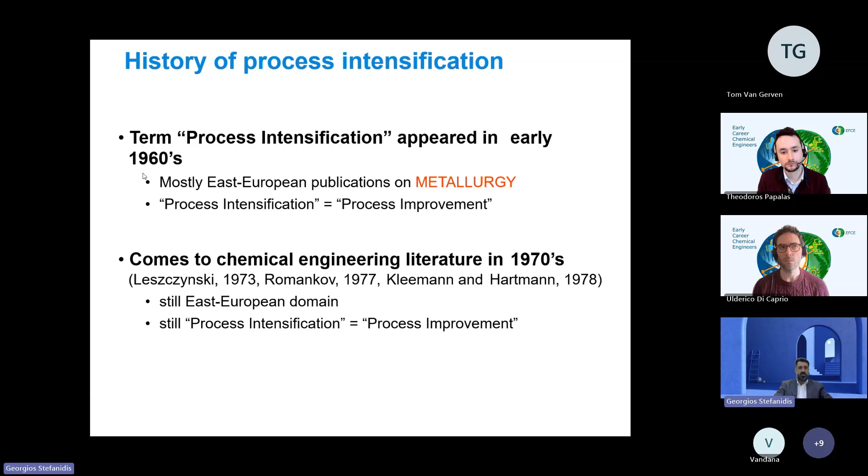In 1983, at a meeting of IChemE, Colin Ramshaw, as I mentioned before, introduces HiGee for the first time. He talks about exceedingly compact plants and an order of magnitude equipment reduction, and compactness was achieved by altering the transport regime, not by shrinking the geometry. Centrifugal acceleration replaced gravity as the governing hydrodynamic parameter.

Interestingly, the first paper presented at that conference was on intensified gold ore leaching. The authors talked about solid-liquid mass transfer intensification, so mass transfer was the bottleneck of that process. So it is clear that early PI was already targeting dominant transport limitations and physics-driven redesign.

In the 80s and early 90s, PI was mainly a British discipline. The focus started being on centrifugal forces, as I mentioned before, and then it evolved towards compact heat exchangers and intensified mixing. In 1995, there's the first dedicated process intensification conference, organized by PIN UK, the Process Intensification Network of UK. In the late 90s, several international research centers emerged in the States, in France, in Germany, in China, and several PI technologies were studied there.

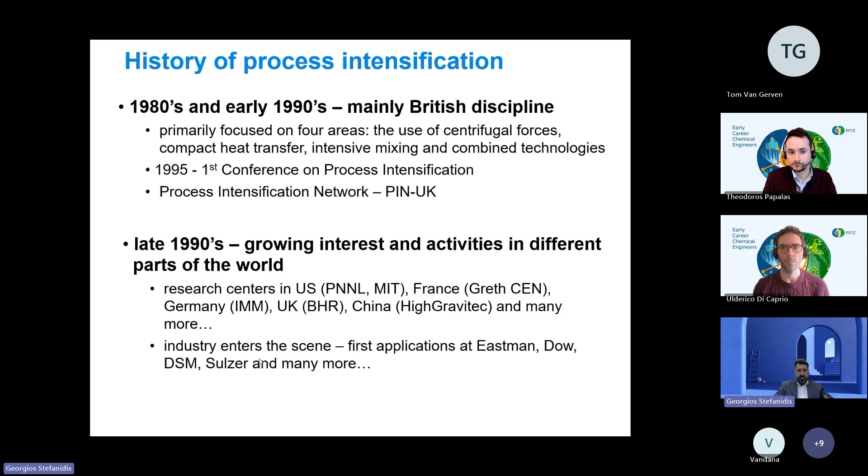In the late 90s, the involvement of industry in the field of process intensification becomes more prominent. Companies like Eastman, Dow, DSM start validating the performance, scalability, and robustness of certain PI technologies, such as reactive distillation, rotating packed beds, microreactors, static mixers. And the validation is done beyond the academic environment.

In the early 2000s, and from that moment on, there is a clear shift from compact equipment to sustainability-driven redesign. There is the recognition that transport and energy efficiency are central to decarbonization. PI becomes institutionalized, with more conferences, textbooks, journals, and research networks working on process intensification. PI is integrated into EU research programs and strategic roadmaps. So what we observe is a clear transition from innovation concepts to a more structural engineering paradigm.

If you scan the literature, there are more than 20 definitions and interpretations of process intensification. I've tried to classify them into different groups depending on the age each definition appeared. In the early 80s, as I said, the focus is on compactness — this is the keyword: compact equipment, order of magnitude reduction.

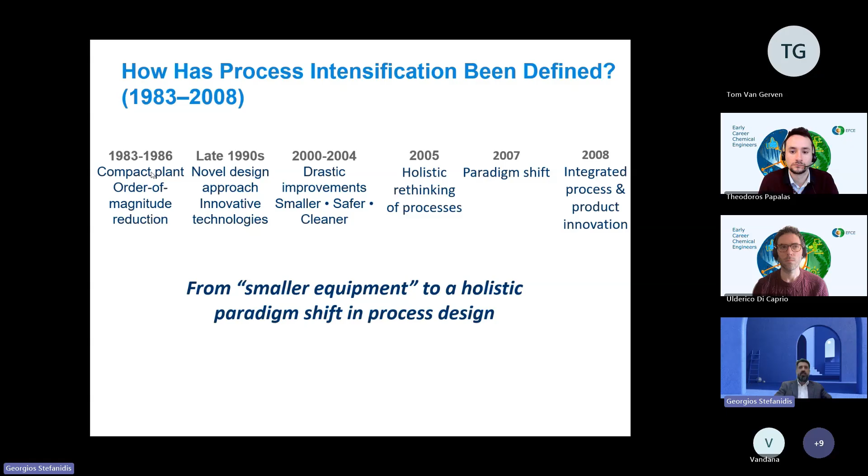In the late 90s, people talk more about novel design approaches and innovative technologies. In the early 2000s, they talk about drastic improvements in processes. It's from the middle of the first decade of the 2000s on that people start recognizing process intensification as a holistic approach to redesign processes and equipment within the broad field of chemical engineering.

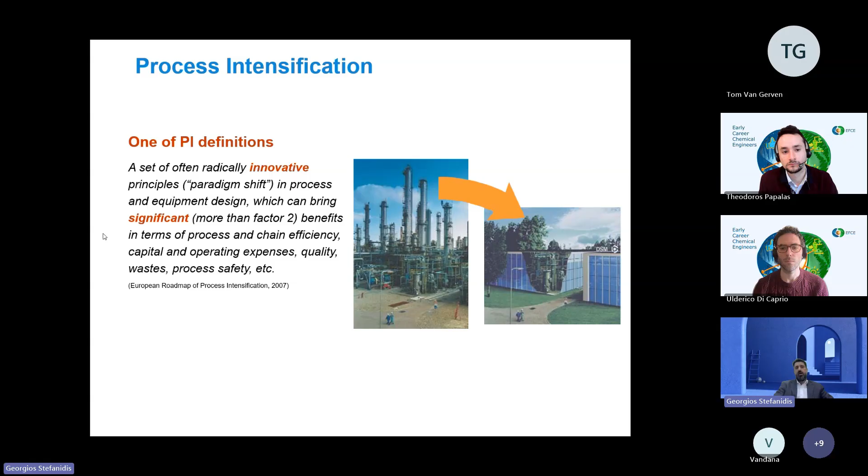From all the available PI definitions, this is my personal favorite. It was published in the European Roadmap of Process Intensification in 2007. It reads as a set of often radically innovative principles, a paradigm shift in process and equipment design, which can bring significantly more than a factor 2 benefits in terms of process and chain efficiency, cutting expenses, quality, waste, and process safety — or, to put it more simply, using much less to produce much more. Less meaning investment, space, time, raw materials, energy, inventory. Much would mean drastic improvement — factors, orders of magnitude, ideally — of improvements.

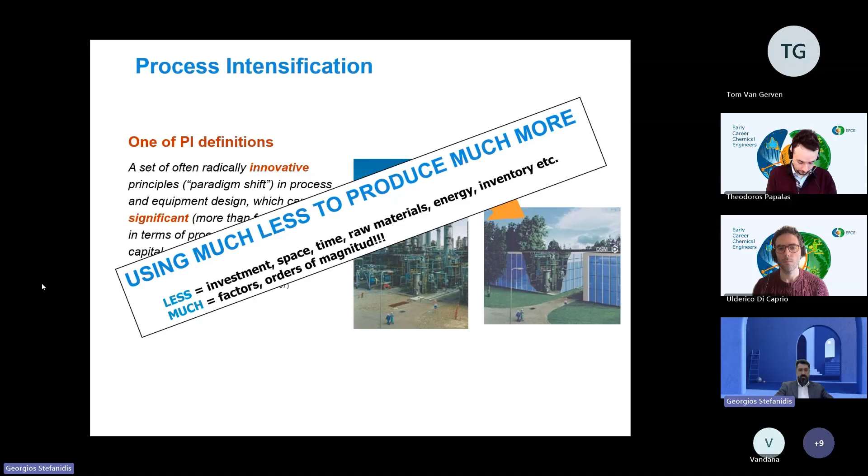Of course, the exact quantified benefits vary depending on the authors who report these benefits and work in the field of process intensification.

This is another report published in 2006 by Senter Novem, the Dutch Energy and Environmental Agency. They report energy savings in the range of 20 to 80%, capex and opex savings of 20 to 80%, selectivity and yield increases up to 10 times or even more, and significant process safety increase as the reactor volume and inventory of chemicals decrease up to 1,000 times, with better control of reactions.

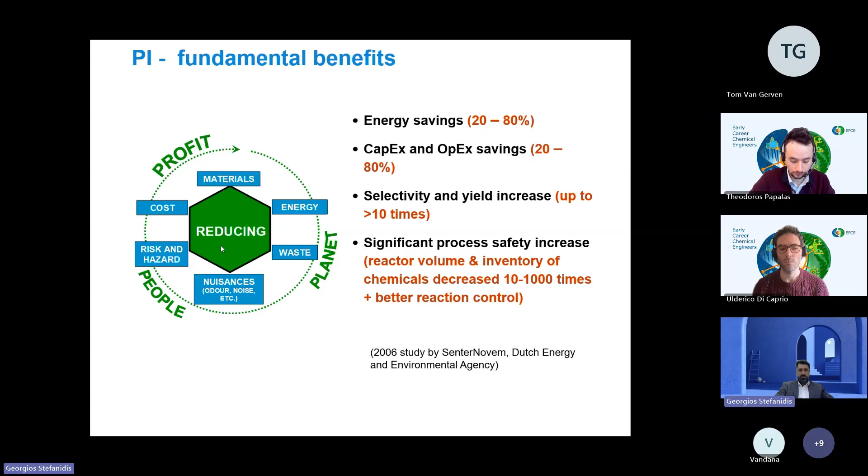Another aspect that is not clear in the minds of many people in chemical engineering is the relation between PI and process systems engineering, and how these two fields differentiate and become complementary. As we see in this figure, PSE, process systems engineering, operates primarily at plant-site and enterprise scales, targeting optimization and integration of existing process units. PI, on the other hand, operates at molecular scale, particle scale, thin film scale, up to process scale, targeting modification of the dominant transport and reaction environments.

So PI targets characteristic length and time scales: reducing diffusion paths, narrowing residence time distribution, enhancing interfacial renewal, increasing reaction rates. It shifts focus from flow sheet optimization, which is the main goal of PSE, to phenomenon-level redesign. So PI acts bottom-up, as you see, while process systems engineering acts top-down.

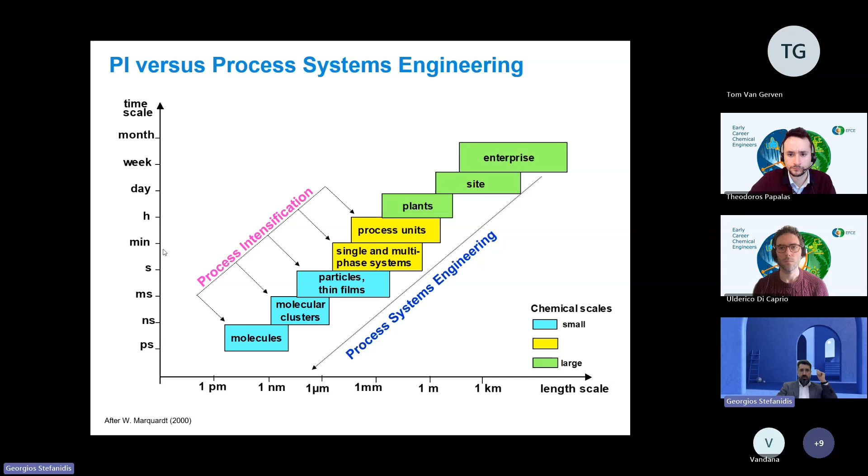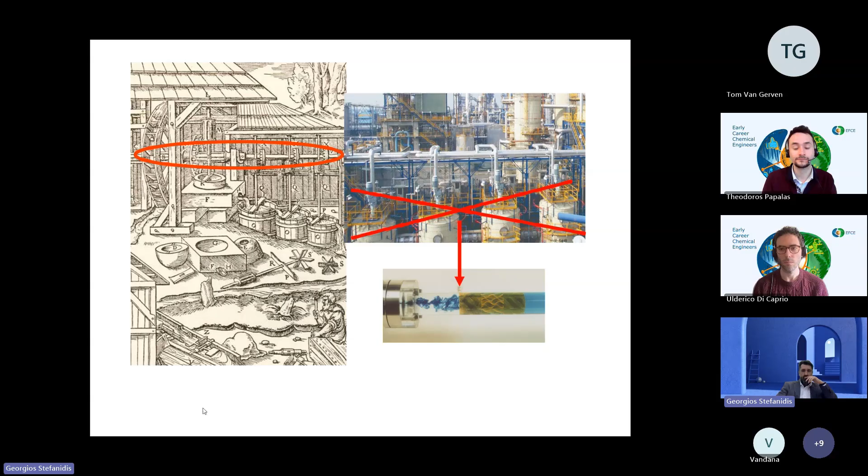This classification was useful back then because it organized somehow the rapidly growing number of intensified technologies. But it's not sufficient for systematic process development, as it lacks a generic multi-scale design framework.

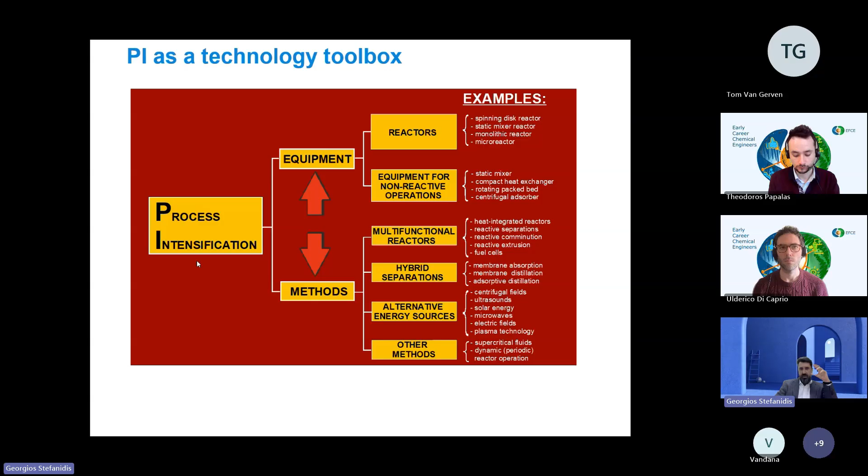It explains our view on the fundamentals of process intensification, and I would like to mention some elements of our approach. So to move beyond isolated technologies, we must first define the ultimate goal of an intensified process. An ideal intensified system is one in which reactions proceed at maximum achievable efficiency, all modes of transport and synergy effects between steps are fully exploited.

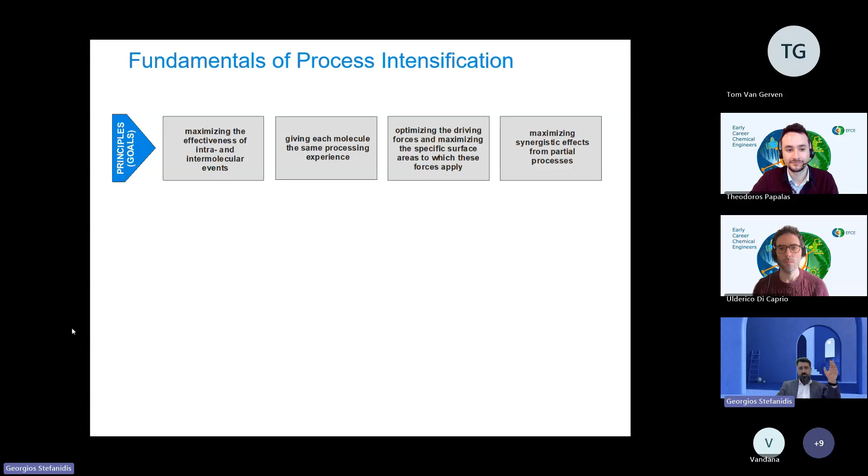So from these definitions arise four generic principles. The four principles of process intensification provide a multi-scale, holistic foundation for process intensification, and they shift the focus from equipment categories to fundamental physical objectives. I'll start with the first principle: maximizing the effectiveness of intra- and intermolecular events.

Classically, the reaction rate is described by the Arrhenius equation. We increase rate either by increasing temperature through heating or by decreasing activation energy using a catalyst. But there's a third parameter, which is also important: the pre-exponential factor that reflects the frequency and effectiveness of molecular collisions. If we want to intensify reaction fundamentally, we must ask whether collision effectiveness itself can be engineered.

The answer is yes, at least in certain environments. This is famous work by Zare, a Science paper from 1998. The authors apply a laser to a molecular beam of methane in order to stretch the C-H bonds, making the hydrogen atoms more visible to chlorine, to increase the frequency of effective hydrogen chloride formation events, and indeed the reaction rate increases by more than two orders of magnitude.

So chemical reactions occur through molecular collisions, yet the vast majority of these collisions are ineffective. In conventional reactors, we energize molecules through conductive heating. This is non-selective; all molecules are heated, not just the reacting ones. So instead of having controlled collisions, like a snooker player deliberately directing its impact, we create a pinball machine with random motion, random impacts, and a broad distribution of molecular energy.

This lack of molecular-level control is the core limitation of current reactor design. Conductive heating also creates temperature gradients inside the reactor. As a result, molecules do not all possess the same energy. Some have insufficient energy to react, some have excessive energy, and some have enough energy to initiate undesired side reactions. In parallel reaction systems, this broad energy distribution directly reduces selectivity and increases waste.

So ideally, we would like to supply all molecules with a narrowly distributed amount of energy, just sufficient to cross the desired transition state and no more than that. This is the objective of principle one: creating a reaction environment where intra- and intermolecular events are controlled rather than left to statistical chance.

The second principle follows naturally from the first. If we want effective molecular events, we must also ensure that all molecules experience the same history inside the reactor. In an ideal intensified process, every molecule should undergo identical residence time, identical thermal exposure, identical mixing conditions, because uniform processing minimizes variability and waste.

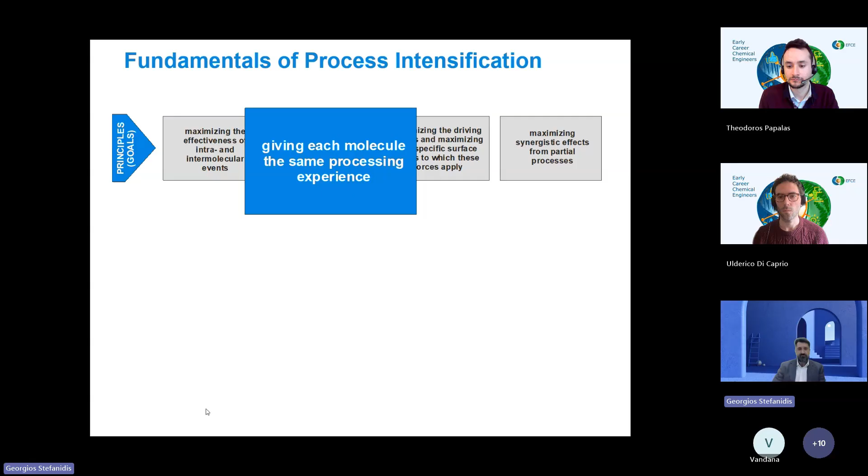But in conventional reactors, molecules do not experience the same conditions. In stir-tank reactors, for example, residence time distribution is broad. Some molecules leave too early, others remain too long. And on top of that, temperature gradients further broaden the distribution of molecular energy levels.

Even in plug flow systems, uniformity is defined only at macroscopic level. At the molecular level, motion remains random. So in fact, true molecular uniformity would require narrow energy distributions and minimal spatial thermal gradients.

And in this regard, application of external fields can play an important role here. So the goal of the second principle is to reduce residence time variance, eliminate dead zones by suppressing hotspots, and minimize micromixing heterogeneity.

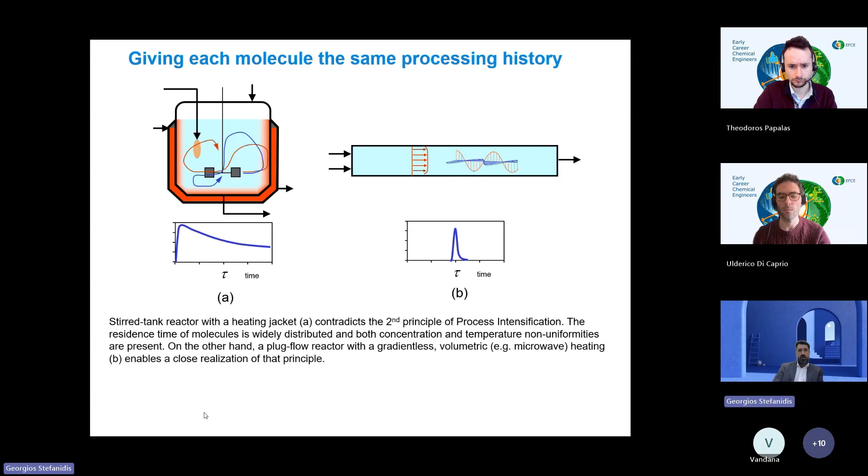Regarding the third principle, uniform process conditions require efficient transport. Efficient transport in turn depends on strong driving forces and high interfacial area, unless external fields are applied. So process intensification here fundamentally means increasing the effectiveness of the driving forces - heat, mass, and momentum transfer - and maximizing the interfacial area over which these forces act.

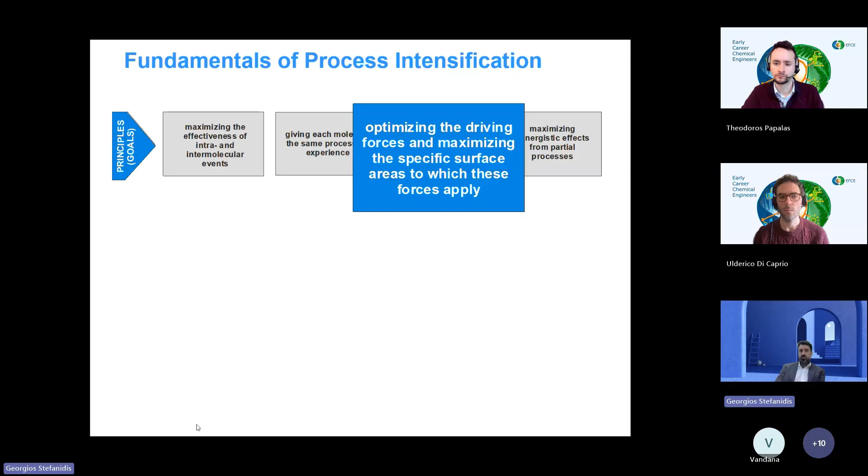Since most chemical processes are transport limited, increasing transfer area per unit volume is one of the most powerful levers that we actually have. The surface-to-volume ratio scales inversely with the characteristic diameter - the A over V factor equals 4 over D - which means that reducing the characteristic dimension by one order of magnitude increases the available transfer area per volume by one order of magnitude as well.

So when we move from meter scale equipment to millimeter or micrometer scale, we increase interfacial density dramatically and therefore enhance heat and mass transfer rates.

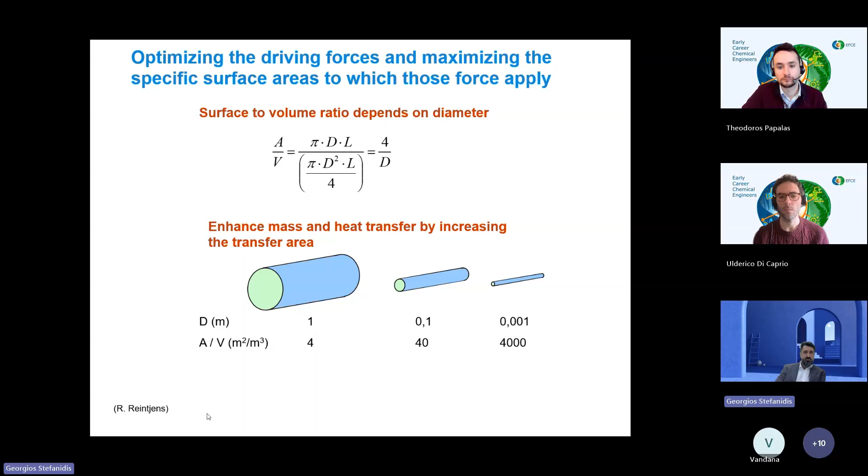And by the way, nature has already optimized mass transfer by minimizing the characteristic length scales. The existence of capillary networks, which enable the exchange of oxygen, CO2, and nutrients, demonstrates that ultra high interfacial densities in the order of 400,000 meters squared per cubic meter are both functional and sustainable. So the question for chemical engineering is how to translate this principle into scalable reactor design.

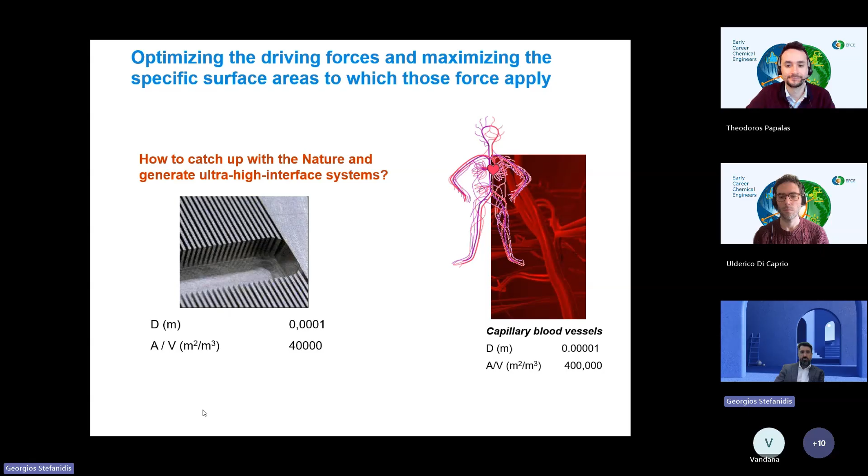Traditionally, chemical processes are divided into separate unit operations: reaction, separation, heat exchange. PI challenges this separation by combining partial processes into multifunctional units. We can create synergistic effects. For example, coupling reaction and separation shifts equilibrium, and combining mixing and energy input enhances transfer rates.

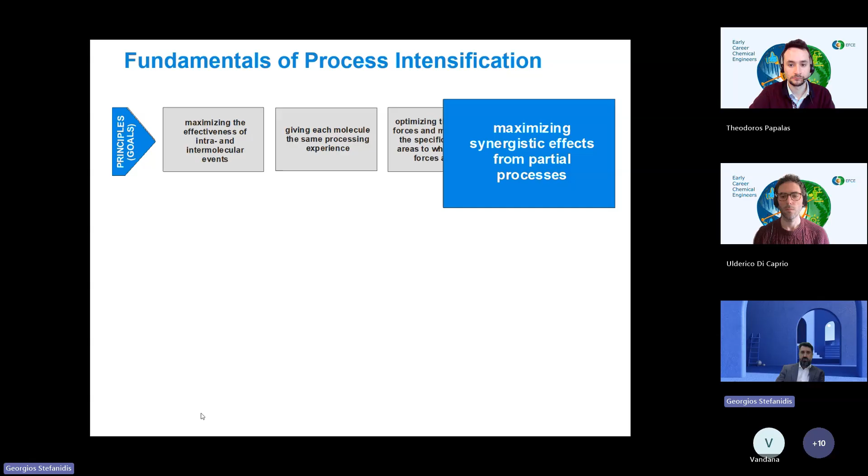So this improvement is not only due to a better catalyst, but due to the integration and coupling of reaction and separation.

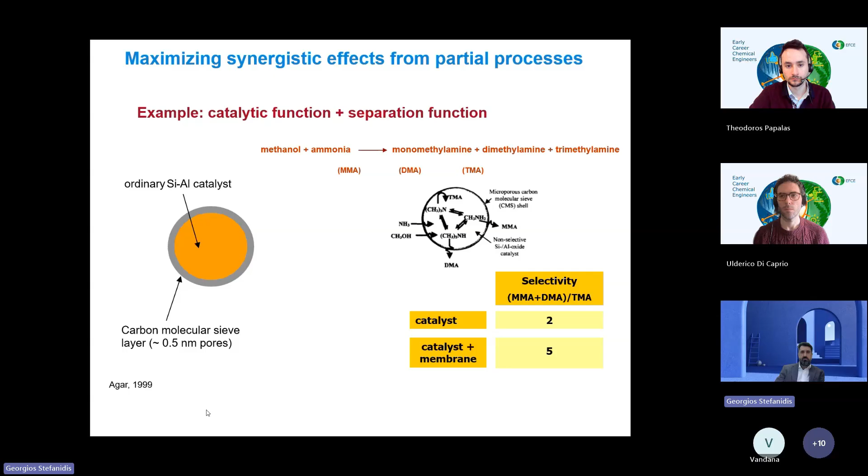So far I have discussed fundamental principles of process intensification. The next question is how these principles are realized in practice. In general, intensification strategies can be organized into four domains: spatial, thermodynamic, functional, and temporal.

I'll start with the first domain, the spatial domain, where process intensification means replacing randomness with structure. As discussed, randomness in catalyst beds, reactors, and fluid distribution leads to maldistribution, poor predictability, and safety risks. Introducing a reproducible structure improves control, modeling reliability, and scale-up. These structures exist at multiple scales.

At the molecular level, we have cages and imprinted systems that control molecular orientation and selectivity. At the mesoscale, you see monoliths, foams, and corrugated packings that enhance heat and mass transfer while reducing pressure drop.

At the macro scale, in the lower part of the slide, you see fractal distributors and structured internals that ensure good flow distribution. So the common idea here is simple: to design the spatial organization deliberately in order to improve transfer rate, selectivity, energy efficiency, and safety.

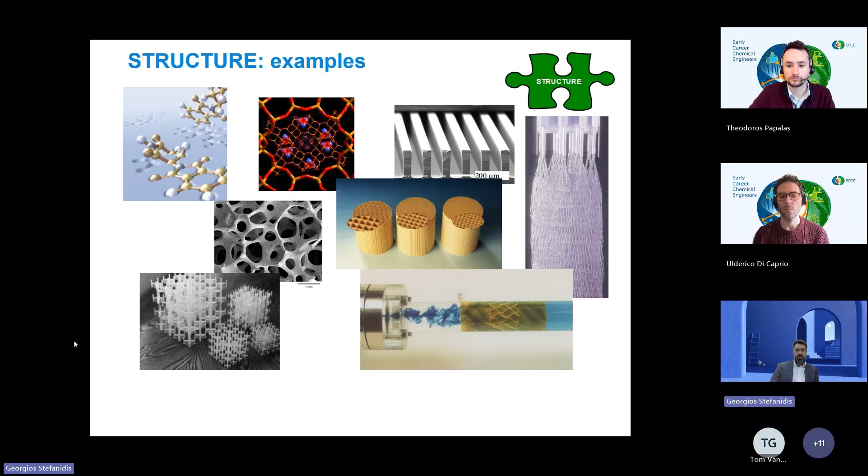An industrial example from DSM: in traditional stir tank reactors, mixing and heat removal occur in large vessels. Heat is removed through a jacket or internal coils. Temperature gradients may develop, especially in fast exothermic reactions.

In microreactor technology, the same chemistry is carried out in thousands of microchannels. Because the characteristic dimension is drastically reduced, the specific heat transfer area increases dramatically, and heat removal becomes extremely efficient.

As a result, the reactor inventory is reduced from 10 cubic meters to only 3 liters, while maintaining the same capacity of 1,700 kilograms per hour. The improved temperature control also leads to 20% better selectivity, which in turn leads to better material yield.

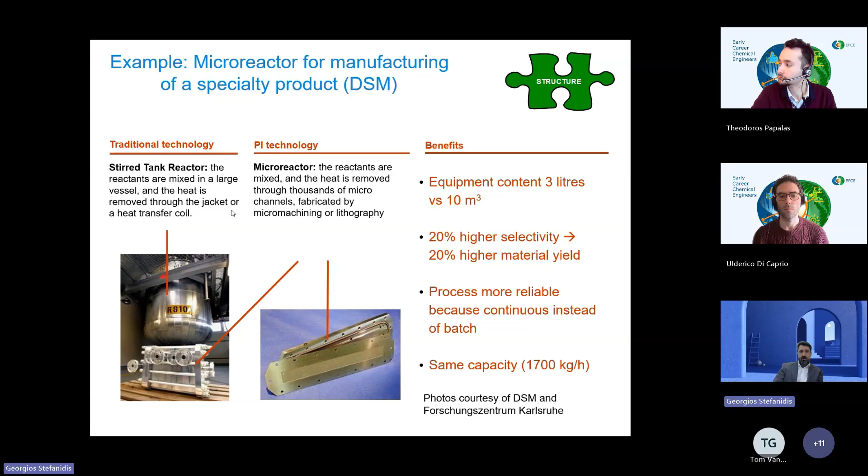After structuring space, the next major lever for process intensification is energy. The chemical industry is highly energy intensive. Most of it, much of this energy, is supplied in a non-selective way, typically through steam boilers and external heating surfaces. In the thermodynamic domain, by intensification, we mean changing how the energy is delivered to the system.

Instead of indirect surface-based heat transfer, we can use alternative energy forms such as electric fields, electromagnetic radiation, plasma, acoustic energy, to interact more directly with the molecules. So in this regard, the energy becomes not just a utility, but a tool to influence the reaction rates, transfer phenomena, and thereby selectivity.

Acoustic fields generate cavitation bubbles. Their collapse creates localized extreme conditions, high temperature and pressure, which can intensify mixing and drive chemical reactions. Plasma fields generate reactive species such as radicals, ions, and other energetic species that allow activation of very stable molecules, for example methane or CO2. Supersonic flows and shock waves convert kinetic energy into rapid compression and extreme local conditions that enhance phase contact and reaction rates.

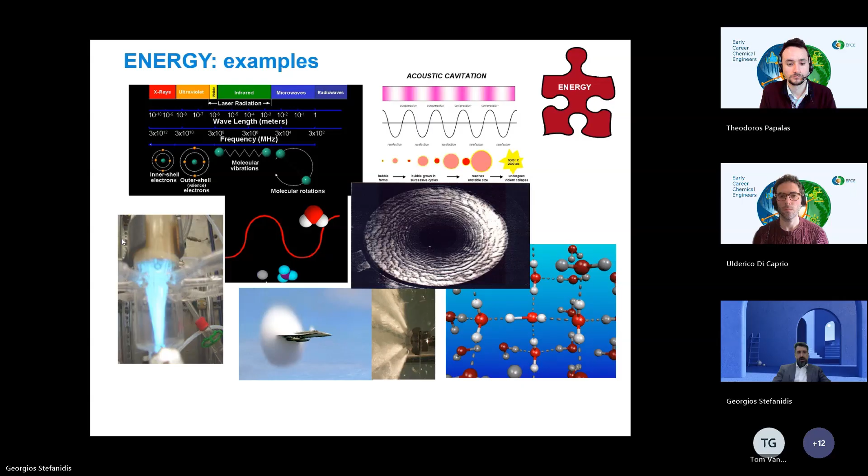And another industrial example in the domain of energy, in the thermodynamic domain. This example illustrates process intensification through use of high gravity fields. It was a Dow Chemical process. In the conventional process, hypochlorous acid is produced in absorption stripping columns. The key challenge is that hypochlorous acid is unstable and must be removed from the reaction environment as quickly as possible to prevent decomposition and side reactions.

In an intensified version, reactive stripping is carried out in a high gravity rotating packed bed. By rotating at high G, at high speed, centrifugal forces up to 500 times gravity increase the interfacial area and mass transfer rates. And as a result, you see the benefits here.

Because the product is removed immediately from the reaction zone, the consequence is that the equipment size is decreased by a factor of 40. Product yield is improved by 15%. There's a 50% reduction in the stripping gas, a 1/3 reduction in waste and chlorinated byproducts, and all that while maintaining the same processing capacity.

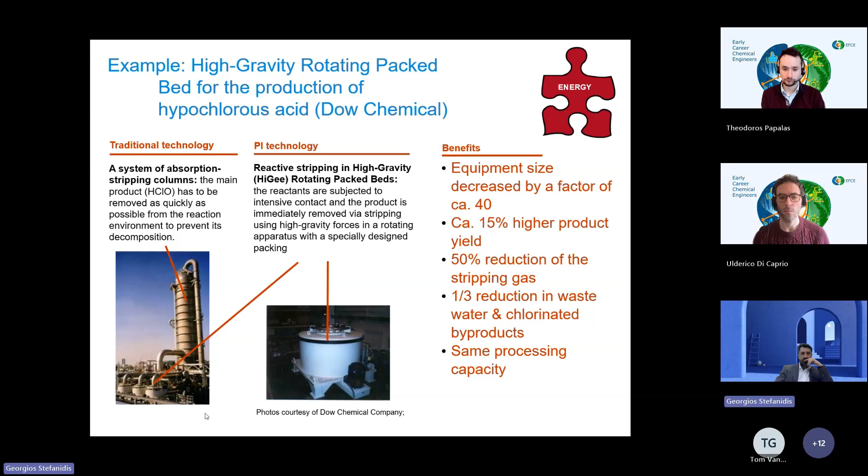The third domain of process intensification is synergy, the functional domain. Here, intensification is achieved by combining functions that are traditionally separated: reaction and separation, mixing and heat transfer, adsorption and catalysis. The objective is to create a system whose performance is better than that of separate units.

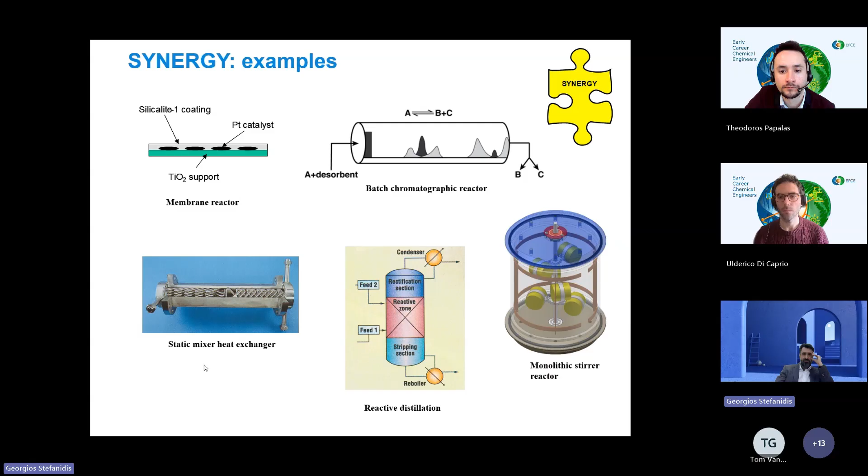These are examples that illustrate functional integration in process intensification: a membrane reactor, chromatographic reactor, a static mixer heat exchanger, a reactive distillation that integrates reaction and separation, and a single column monolithic stirrer reactor that combines catalysis and mixing. The common benefit is, again, improved selectivity, better conversion, reduced equipment count, and lower energy consumption, and of course a more compact and more efficient process.

An industrial example comes from the Eastman Chemical Company. In the conventional methyl acetate process, 28 separate units are needed to produce methyl acetate due to azeotrope separation issues. By integrating reaction and separation in a multifunctional column, combining reactive and extractive distillation, the entire process is reduced to just 3 units, and the result is 85% energy consumption reduction and about 80% lower investment.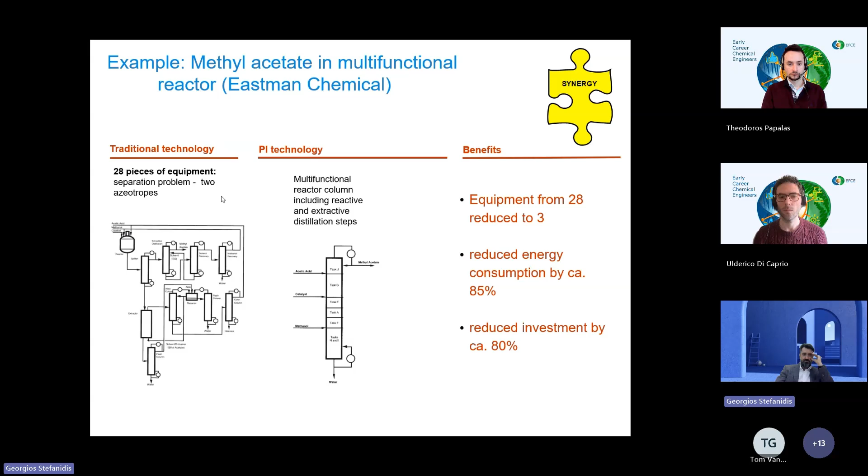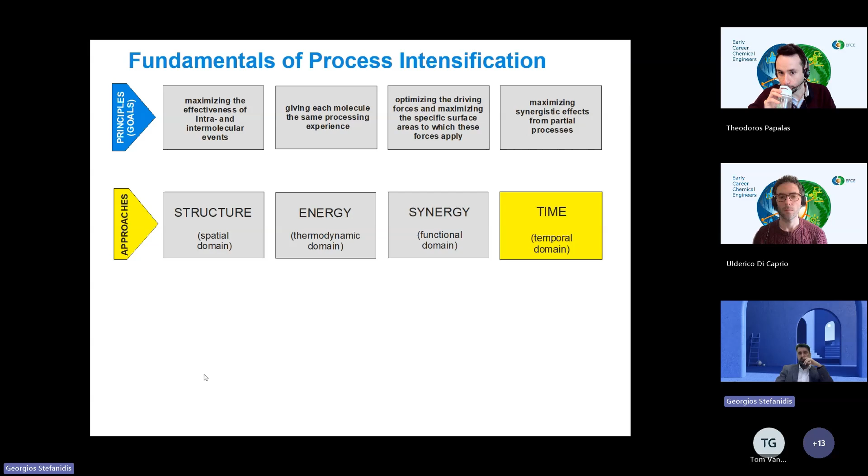And the fourth domain is time. Here, the key manipulated variable is the temporal operation. We introduce controlled periodicity or extreme shortening of contact times to manipulate time scales. Instead of steady state operation, we deliberately use oscillations, flow reversal, cyclic operation, millisecond contact time reactors to enhance transport, heat management, and eventually selectivity and yield.

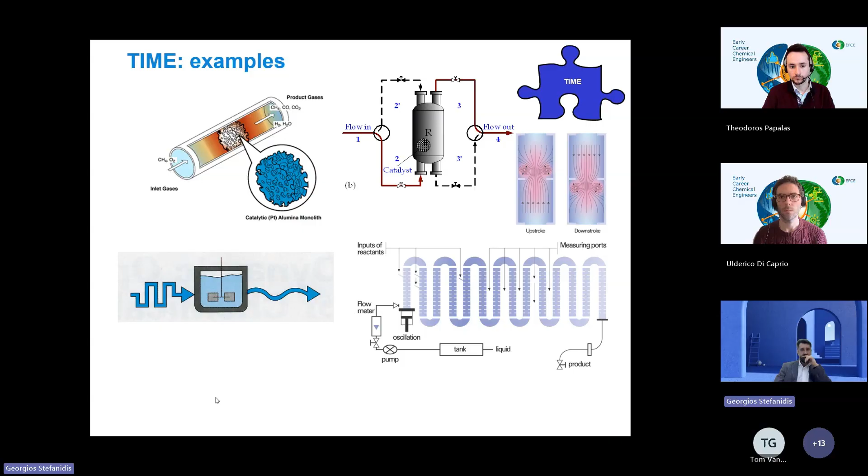These are examples of some CPI technologies: oscillatory flow reactors that generate vortices through periodic motion, enhancing mixing while maintaining plug flow behavior; reverse flow reactors that periodically switch flow direction to generate heat and enable autothermal operation; short contact time reactors that use millisecond residence times to control selectivity; periodic feeding of CSTRs to introduce controlled concentration oscillations and enhance selectivity. And again, an industrial example from the James Robinson Company, a specialty chemicals manufacturing company.

A 27-meter batch reactor was replaced by a compact oscillatory flow reactor. And the result was a 20 times reduction in footprint and process time, with lower cost, energy use, and waste.

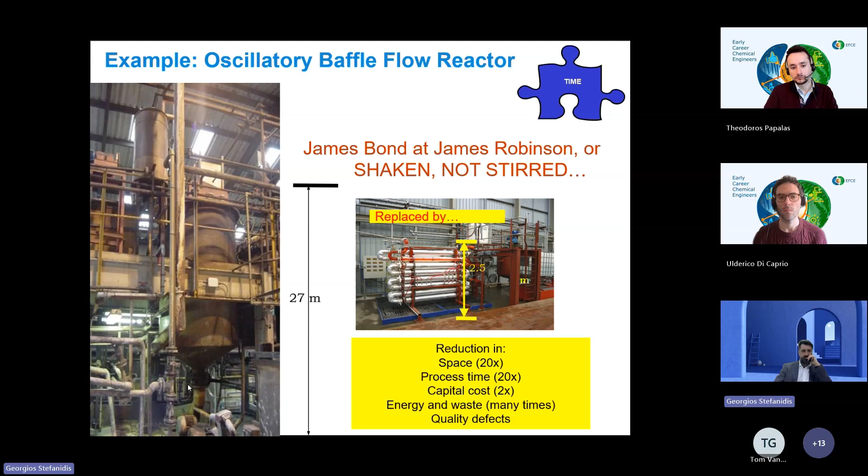And that concludes my presentation on the fundamentals of PI. If I can put it in one sentence, PI is essentially the deliberate control of phenomena across all spatial and temporal scales.

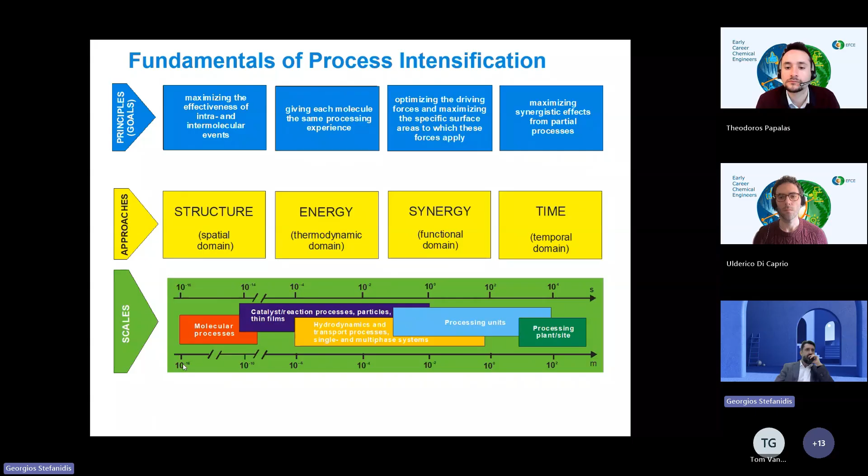Very briefly, on 3-4 slides, on the working party on process intensification. It's almost 20 years old. It started actually from an initiative of NPT, the Dutch member society of EFCE, to establish a new working party in the area of process intensification. In July 2005, the General Assembly of EFCE approved the establishment of the working party on process intensification. And in May 2006, about a year later, there was the inaugural meeting of the PI Working Party on the premises of DECHEMA in Frankfurt.

Our aim is to advance PI approaches and technologies both in academia and industry, promoting education, dissemination, and collaborative research. And through European and international partnerships, we aim to accelerate innovation and the practical implementation of intensified processes.

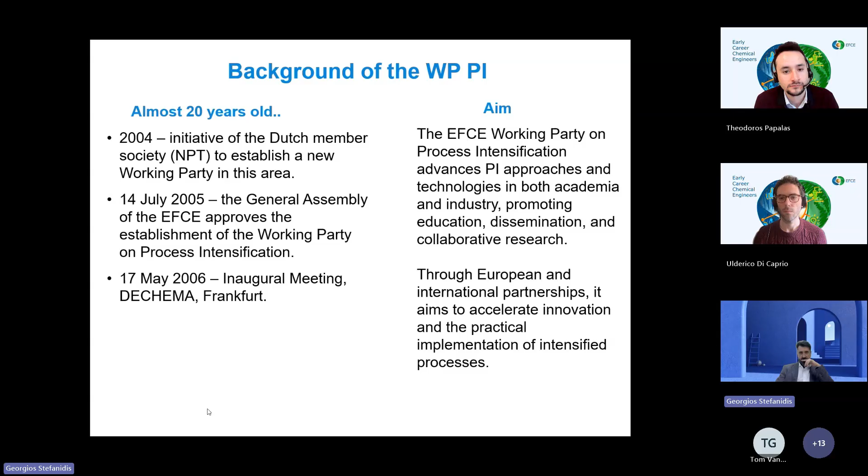At the moment, we have 32 members in our working party: 17 academic delegates, 9 industrial delegates, 3 elected members, and 3 guest members.

Our main activities include 1 or 2 business meetings a year. We organize or co-organize workshops and webinars. For example, we do at least one spotlight talk webinar every year on various PI subjects, often in collaboration with other EFCE entities like the CRE Working Party and the MFF Working Party. There's also a new section in the EFCE under organization on artificial intelligence, and we're going to co-organize a joint webinar on the application of AI to process intensification, probably in April.

We organize dedicated PI sessions in international conferences like ECCE, CHISA, and ISCRE. We deliver 2 PI awards biennially: the PI Excellence Award for the best PhD dissertation in the field of process intensification, and the PI Award for Industrial Innovation.

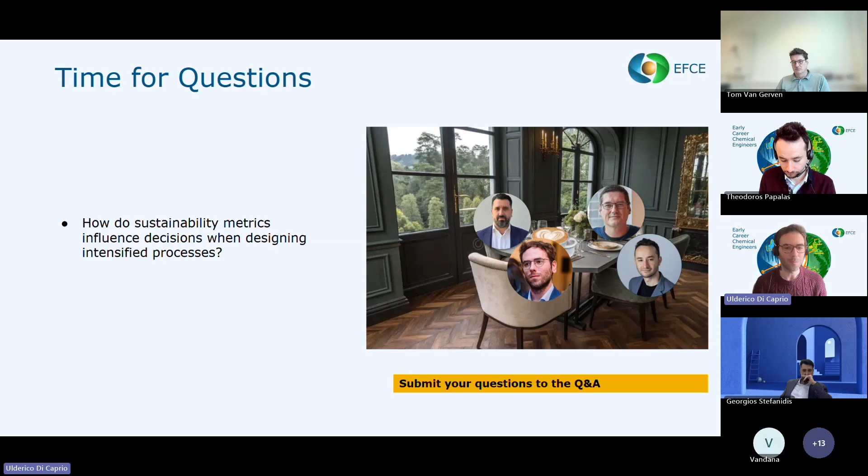Thank you. And our last question is about the future of PI as we live in a continuously evolving scientific landscape. What do you think the next big change will be in process intensification?

The next big change is certainly not going to be a certain technology or drastic improvement of an existing technology or a new technology. I think this field is more or less mature in terms of development of new technologies. What I see as new trends is the adoption of electrified reactors that work on renewable electricity - for example microwaves, ultrasound, plasma reactors - real-time adaptive control, AI-driven process control, and modular distributed manufacturing. I would say these four aspects constitute the new trends in process intensification.

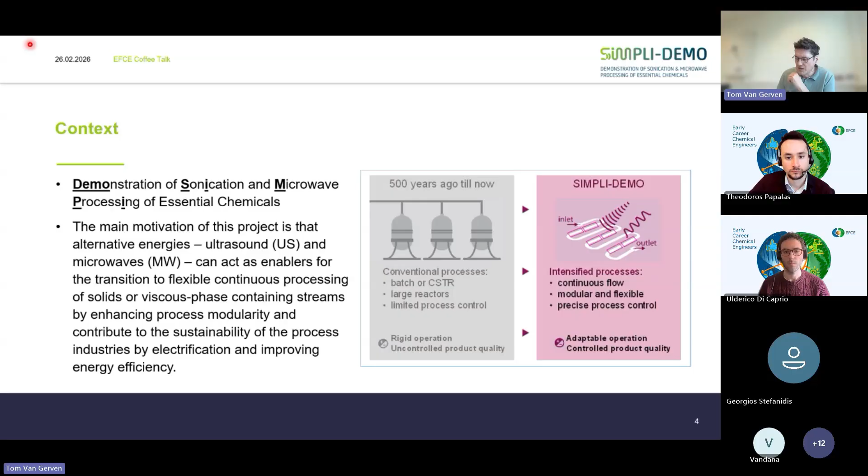The perspective that we have taken in this project is that we believe these alternative energy forms, ultrasound and microwaves, can act as enablers for the transition of batch to continuous processing. We particularly see that for two types of difficult processes that are hard to transfer from batch to continuous: viscous phase containing streams, and solids containing streams. These are two processes where, if you look into industry or literature, it's not straightforward to find examples where they have been converted into a continuous flow system. We think that ultrasound and microwaves can help make that transition.

So as I said, we're focusing in SIMPLI-DEMO on two types of specialty processes. On the one hand, highly viscous streams, where we're typically using reactive extrusion as the continuous flow technology. We have two end users involved there, Coatex, which is now part of Arkema, and Mega Resins. The end use cases deal with polyurethane production, both isocyanate based and non-isocyanate based, and also polyether synthesis.

The other type of chemical process is the one involving suspensions, and there we're looking at reactive crystallization in an oscillatory baffle flow reactor, a COBR, as the continuous technology of choice. Again, here we have two end users: Arkema, who's interested in zeolite synthesis, and GE Healthcare, General Electric Healthcare, who's interested in API synthesis, advanced or active pharmaceutical ingredients.

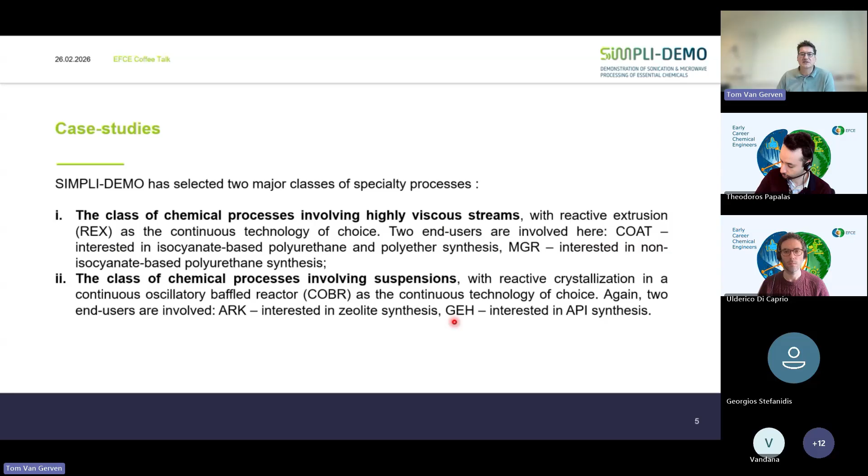The idea of the project, at least at the beginning and still now, was that we were supposed to move from TRL5, meaning the technology was validated in a relevant environment at the start of the project, to a TRL level of 7, meaning we have to demonstrate an industrial system prototype. I won't touch on that too much in this presentation, but it means we have process control and process automation available on the different demonstrators, which allows us to work with them for longer periods of time than we would in the lab.

The overall goal is an uninterrupted production of several days to weeks. We'll see if we can really show that - certainly not for all the end use cases, but maybe for some of them. In any case, what we already can show now is that we do have annual production rates. If you translate the production rate to an annual rate, it's 10 to 100 tons a year, which is a decent production for a pilot scale installation.

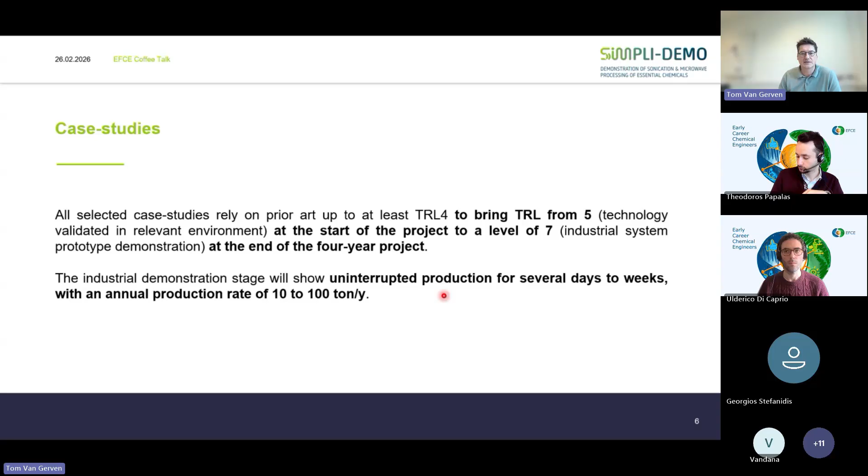Just a short word on the consortium. As with any European project, we consist of knowledge institutes - Leuven, Athens, Dortmund, Heriot-Watt in the UK, and Fraunhofer Institute of Chemical Technology in Germany. Then we have companies: 4 end users - Arkema, GE Healthcare, Coatex, and Mega Resins. Then 2 technology suppliers on the ultrasound and microwave side - Mügge for microwaves, Weber Ultrasonics for ultrasound, and there's also someone from Weber present at this meeting. Then we have Leicon, involved in process automation, working closely with the Technical University of Dortmund, who does the process control. And we also have Aristeng, doing the process design calculations and the LCA calculations.

The project approach was the following: the SIMPLI-DEMO project actually followed on from a previous European project, the SIMPLIFY project. In the SIMPLIFY project, we already had 2 use cases relevant to Arkema and Coatex, meaning that we were...

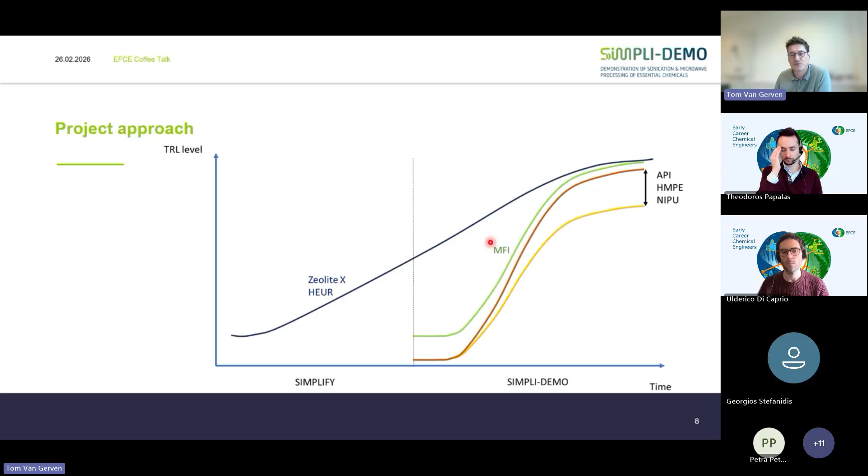So basically, where are we at this moment in the project? We're approaching the project end, meaning we've done the parametric validation of the different concepts. We've further developed the two use cases from the previous project, and complemented that with other components we've investigated. We're now in the demonstration phase, basically at TRL 7, for the different technologies - the combined and integrated technologies, including process control and process automation.

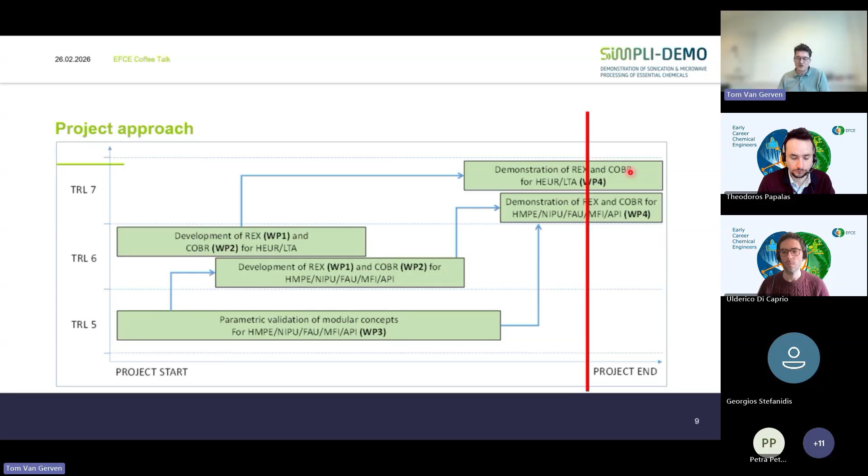So which technologies are involved? Basically there are 4 big PI technologies. The first 2 relate to continuous flow operation. On one hand we have the oscillatory baffle flow reactors - a tubular reactor with baffles inserted in the tube. With pulsed flow, you ensure constant turbulence even at low net flow rates. This is an interesting feature because when solids are present or forming during crystallization, a big problem in tubular reactors is sedimentation and clogging. You avoid that with this turbulent flow, even at low net flow rates, which still allows a reasonable residence time.

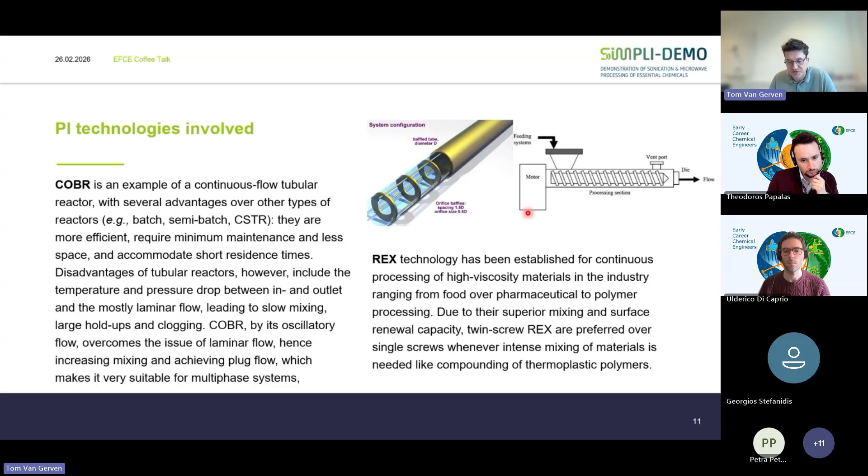On the other hand, we're also looking at reactive extrusion technology, very common for high viscosity materials. We're applying reactive extruders, REX technology, for the different types of polyurethanes and polyethers we're producing. As mentioned before, we're combining this with ultrasound and microwaves as non-contact energy forms - ultrasound mostly for improved mixing and mass transfer within the tubular reactors, microwave mostly for improved heat transfer in these reactors.

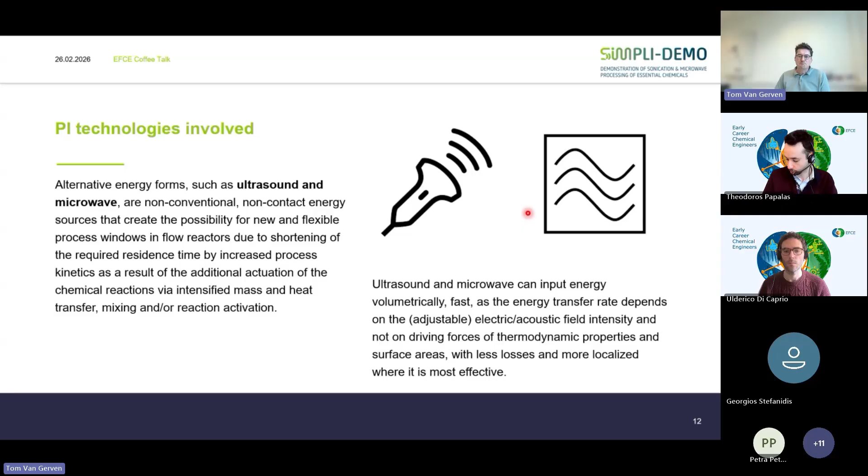So if we look at how we've demonstrated and integrated those processes, I'll give you a very short overview of some of the results. Of course I cannot go over all the results, and there are some results we're not able to share, but I want to just show you the overall picture here.

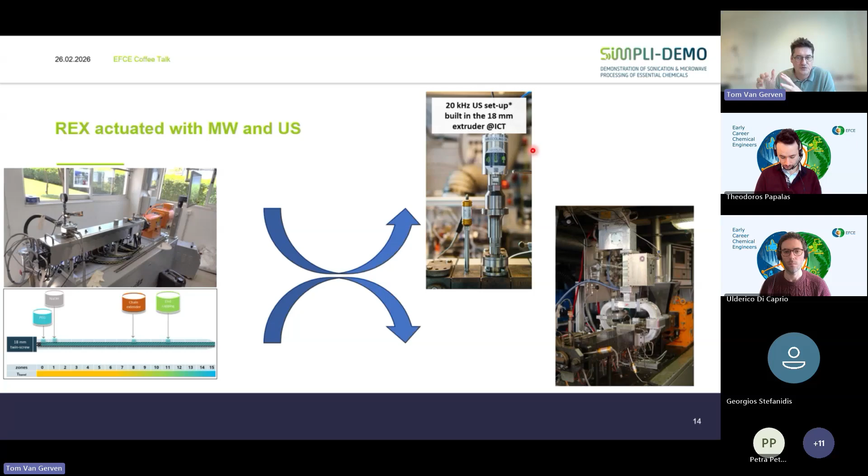The way we went about this is we first started with this continuous flow system. In this case, I'm showing you a picture of a reactive extruder, which we optimized for this particular set of chemistries - polyurethanes, polyethers. Only in a later phase did we start to integrate ultrasound and microwave into these reactive extruders. In parallel with our first investigation into reactive extruders, we also looked at the individual energy forms, ultrasound and microwaves, but the combination and integration with the reactive extruder only came later into the project.

So the overall view was that we would enhance the application or operation of the extruder with the use of ultrasound and microwave. Interestingly enough, we were going to do that in a modular fashion, meaning we designed ultrasound and microwave antennas in such a way that we can apply them to a certain module within the extruder, and move that module around, placing it upstream or downstream in the system.

This allows us to be flexible in terms of the different chemistries we're applying. The first thing we needed to do was apply the chemistry to the reactive extruder, which took some time to optimize. As you can see here, initially we were not able to replicate the same product properties of certain products in the extruder compared to the properties in batch operation.

But then, by further optimizing the chemistry and looking at exactly where we need the extruder, in this particular case we said, let's use the reactive extruder for the first two steps of the polymerization process. The third step is something we do in batch. This allowed us to get much better product properties in the end. This is an adaptation - something I think we always need to do - adapting the chemistry, which is usually optimized for batch, for the flow technology.

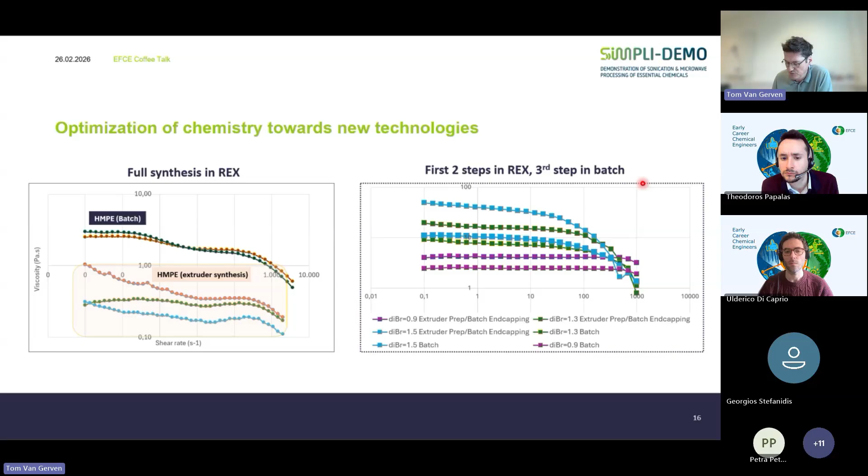A lot of this chemistry optimization was done at the laboratory scale. Then we moved to the pilot scale - the continuous scale - in a first pilot, and then a second pilot or production scale. As you can see, the throughputs went from 0.5 up to 10 kilograms per hour, up to even 60 kilograms per hour. If you calculate that to an annual throughput, you're into the hundreds of tons per year.

The fact that we were working with different chemistries allowed us to move ahead with the chemistry we knew well from a previous project, where we are already at TRL7. The others are a bit behind, but we hope to move them up to higher TRL levels in the last few months of this project.

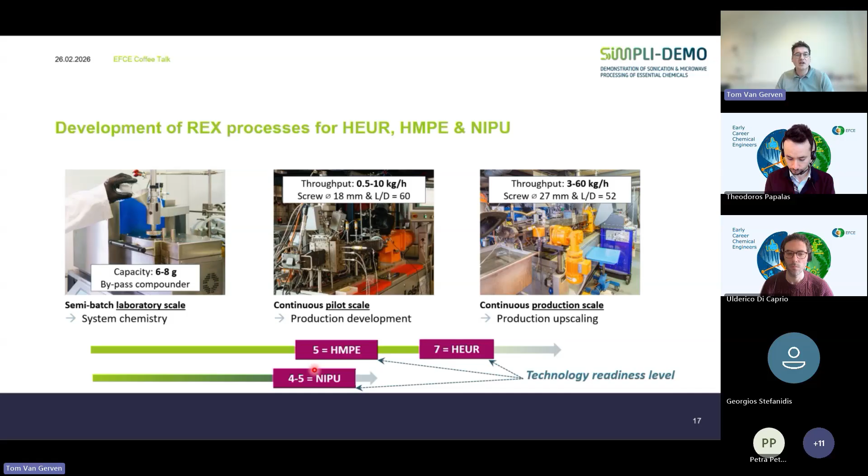This is mostly the reactive extruder for the synthesis of these urethanes. We also looked at the integration of microwaves - this is work of the group of Georgios Stefanidis, the speaker of the previous presentation - where we looked at temperature cycling. Using microwaves, we're not bound by the inertia of typical steam heating or other conventional heating, which allows us to go to a very quick turning on and off of the heating source, enabling temperature cycling.

You see here different profiles of temperature cycling, moving up to spikes of 230, 220 degrees. What you see in the different colors is the average temperature between minimum and maximum time-weighted averages. Looking at the results in terms of molecular weight produced, these average temperatures, in a pulsed or temperature-cycled fashion, allow us to achieve much higher molecular weights compared to conventional heating. For example, conventional heating at 140 degrees - if you compare that with an average temperature profile of 134 to 148 degrees, you see that with microwaves you can obtain much higher values, much higher molecular weights of the final product.

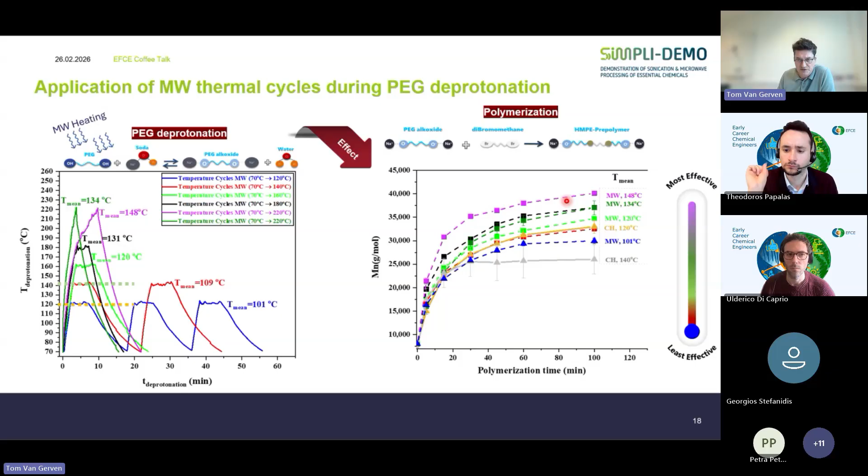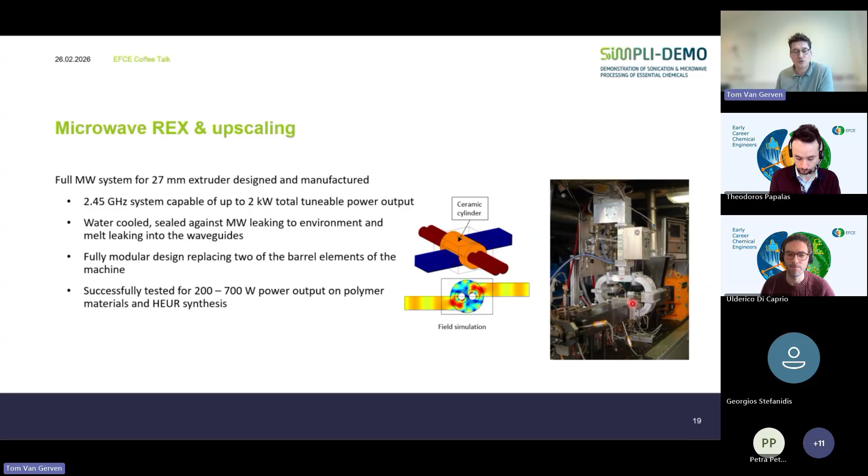The technology suppliers also worked on the upscaling of their technologies, the microwaves and ultrasounds, with the reactive extruder. I'm just showing you some results of the microwaves, not of the ultrasound, but this is equally important. We need to adapt the microwave and ultrasound antennas so that they can be integrated effectively in the reactive extruder, or later on in the oscillatory baffle flow reactor.

Coming to that oscillatory baffle flow reactor, this was used for another set of applications, more the suspensions type of processes, where we had suspensions of zeolites or APIs, depending on the end use case. And again, we took the same procedure.

We started with the COBR, the oscillatory baffle flow reactor. We optimized the chemistry for that continuous flow system. At the same time, we investigated on the lab scale the effect of ultrasound and microwaves, and then later on in the project, we integrated the ultrasound and the microwaves into the COBR system.

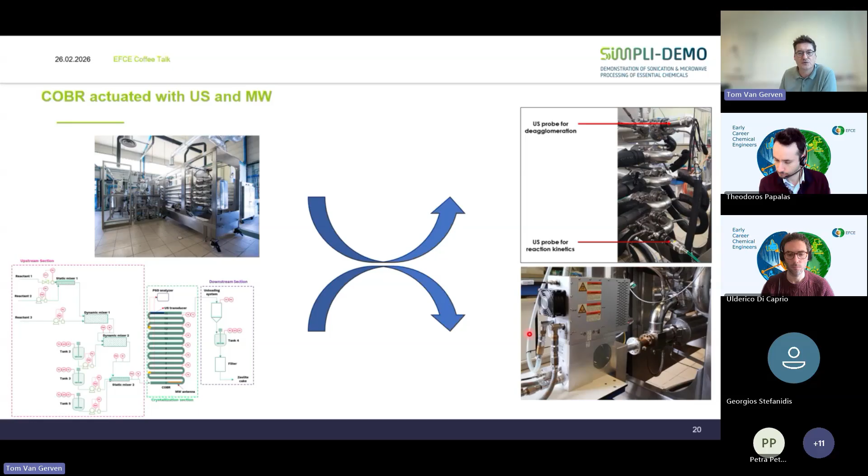In the previous section, with the reactive extruders, I focused more on the microwaves. With the COBR, I will focus more on the ultrasound, just to give you a flavor of the different combinations that we've investigated.

So again, an overview of what we try to achieve with this combination. At the heart of the process, there's the COBR reactor, where we're performing the crystallization either of the zeolite or of the API. It means that we have different raw materials, different feed streams. You need to mix them, bring them into the COBR, and then we're looking at the application of ultrasound and microwaves in this COBR reactor.

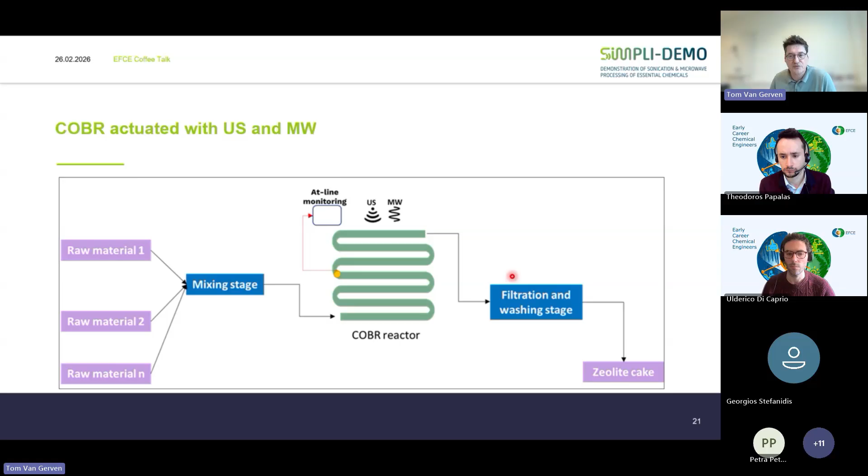And then afterwards, of course, there's the whole set of separation and downstream purification of the different products. So similar to what I showed with the reactive extruders, we needed to optimize the chemistry towards the continuous flow system, towards the COBR. We had to adjust certain parameters - temperature, pressure, flow rate - to get a certain quality according to specifications.

And as you can see, this was nicely done. You see here nicely produced, very homogeneous or uniform crystals of different types of zeolites that we were able to produce within the COBR.

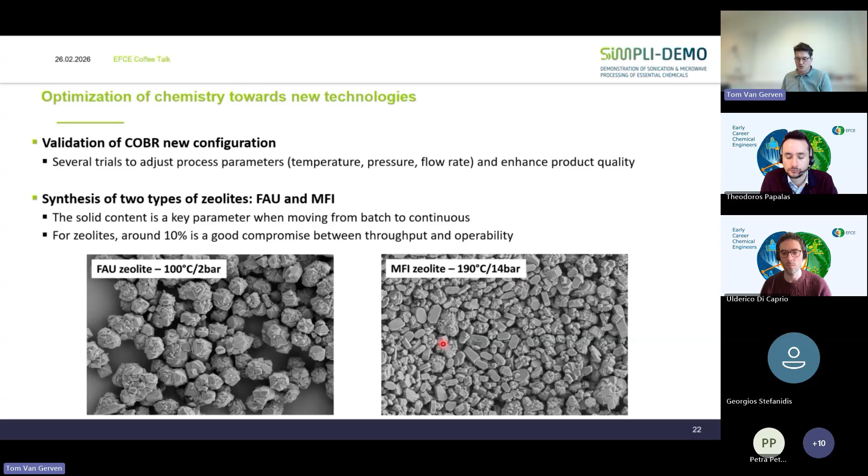And then later on, we started to apply or combine the COBR with ultrasound and microwaves. I'll focus now more on the ultrasound. There's different ways that you can use the ultrasound. You can use it early on in the COBR for nucleation, but we also investigated the use of ultrasound towards the end of the COBR, more for deagglomeration. And this is something that we've also investigated.

Obviously, I'm showing here the best results, but you can imagine that in such a project you have also less good results. I'm not going to show them here, but it's a continuous study of trying to find the best operational variables to find where exactly these PI technologies can work, and it relates a little bit to what Georgios said before. With PI, we're trying to open up new windows of operation, and it's often really finding the niche window where this PI technology operates best and where it really works better than the conventional technology.

I just want to show you here with the ultrasound probe, we tested the stability of the ultrasound frequency in the system, proved to be very stable. And then if we looked at the capability of the ultrasound to deagglomerate the particles, we see that moving from point 2, which is before the ultrasound probe, towards point 3, which is after the ultrasound probe, you see a reduction in particle size or in agglomerate size.

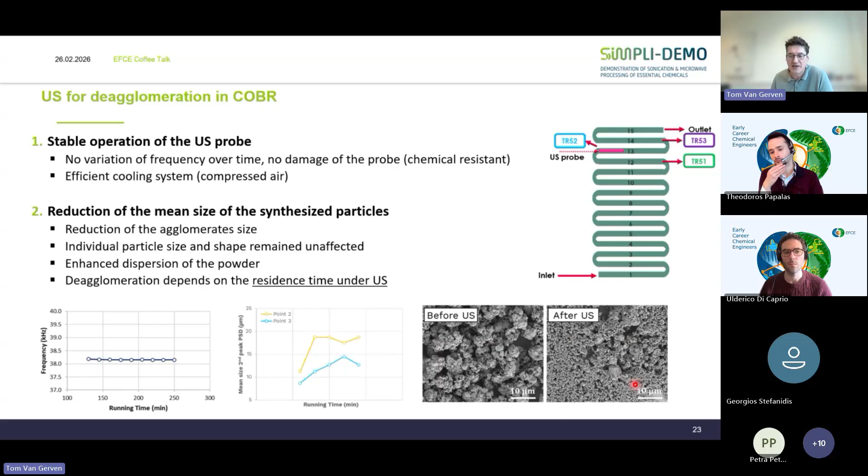And you also see it here on the pictures, a clear difference between the coarser agglomerates before the ultrasound and the more finer deagglomerated particles after the ultrasound probe.

At the same time, we're also looking at the lab scale to look at the optimal integration of ultrasound with different types of reactors. As you can see here, we are looking at batch operations with different types of ultrasound plate transducers, horn transducers. We're also looking at the COBR. We're looking at tubular reactors.

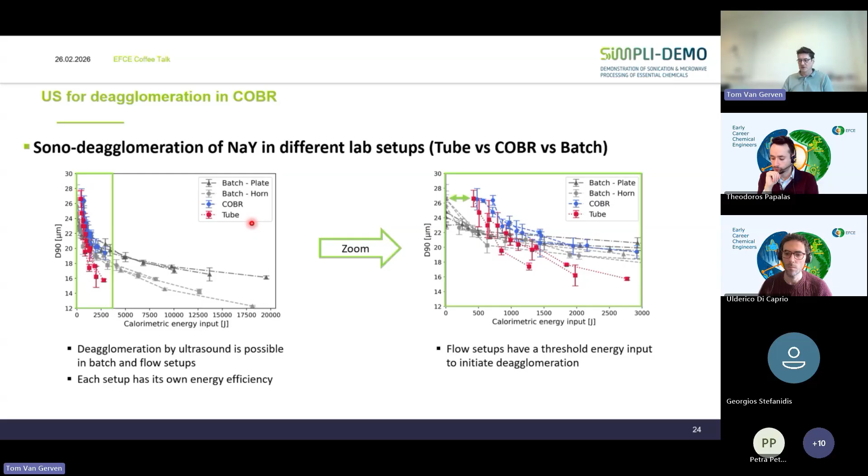What it's clearly shown is that when you try to optimize the calorimetric energy input for a certain effect, in this case particle size reduction, it's clear that setups have their own energy efficiency, and there is a lot of optimization to be done between different types of irradiation sources - in this case, again, plate type of ultrasound irradiation source or horn type of irradiation source, and so forth.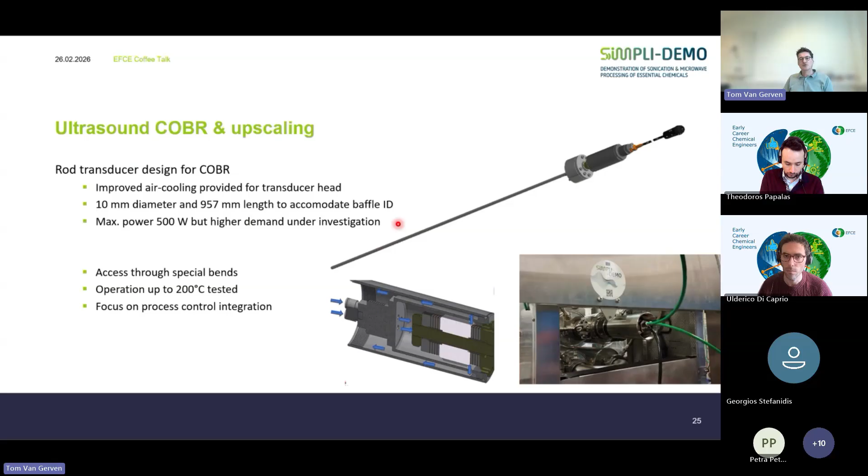You have these rod transducers here. The rod obviously has to go into the oscillatory baffle flow reactor, which means that it has to be smaller than the opening of the baffles themselves. So this is also a design constraint that needed to be taken into account.

And then finally, what we also did is we looked at economic and environmental considerations. As I said before, this was mainly the task of our project partner Aristeng, which collaborated very much with the end users because they have a good view on energy, materials, costs, operational costs, capital costs, and so forth.

The basic methodology was that, first of all, we tried to come up with high quality mass and energy balances, which then allows us to move to process economics using empirical equations, research data from the project, vendor quotes, and expertise from the end users. This was all done in AspenTech software, which we used to further optimize these mass and energy balances and process economics. Then, often combining with Excel, we performed life cycle assessment and techno-economic analysis.

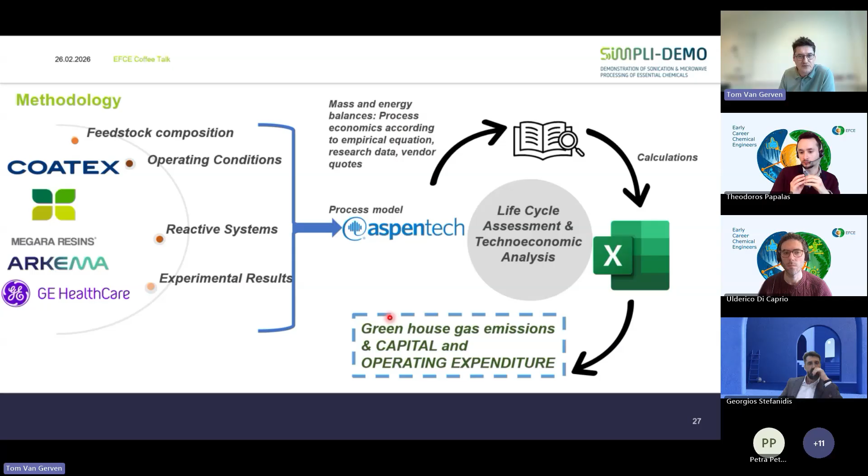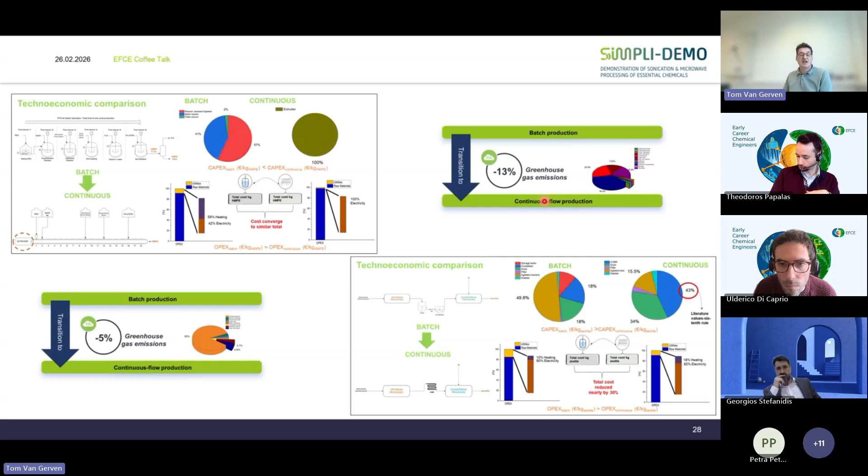All this led us to the possibility to compare CAPEX, OPEX, and greenhouse gas emissions between the conventional system and the intensified process. And this gives types of results like this. I won't go into detail, but what you can see is that we're comparing batch operation with continuous operation. We're looking at CAPEX, OPEX, and greenhouse gas emissions, and in some cases we see improvements of the intensified technology compared to the conventional technology.

Finally, I'd like to conclude with two concluding slides here. On a qualitative perspective, we can say that these PI technologies allow us to handle higher viscosity streams, high solids loading streams. This means you often can allow less dilution of the reactants, which means you reduce your solvent volume, and this is beneficial from a material cost point of view.

Secondly, because of those smaller process volumes, it's often easier to integrate heat and to avoid heat losses. Thirdly, because we're using pulsed operation, both the reactive extruder and oscillatory baffle flow reactors use pulsed fluid pumping, which we combine with ultrasound and microwaves. Those are all electrified technologies, so these processes are suited for electrification, and they open the possibility of using renewable energy.

At this moment we didn't focus on that, but this is a clear driver for reducing energy costs. In some cases, we also saw that going from batch to continuous, we are able to recycle certain diluents or solvents, again increasing materials efficiency, reducing waste generation, and reducing materials feed requirements.

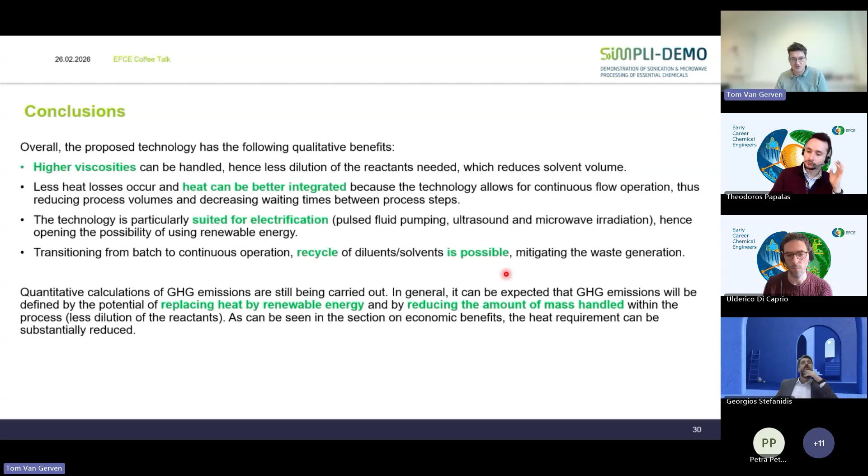So the two basic improvements we can see from this transformation from the conventional process to the intensified process is that we can replace heat by renewable energy and electrify the process, and we are able to reduce the amount of mass handled because of the smaller volumes. This leads to changes in CAPEX and OPEX.

In terms of CAPEX, it's clear, it's a mixed story, we have to be clear about that. We see that in 3 of the 4 cases, there was an increase in CapEx because of the new technologies needed, rotating internals, pulsing internals, powerful motors, and so forth. In one case, we saw a decrease in CapEx, mostly due to the fact that the conventional process had a lot of individual unit operations or units needed.

As regards OpEx, often you don't see significant changes, it stays more or less the same. But because you can go to an electricity-based activation, an electrification type of technology, the assumption is that we will be able to use renewable energy supply. As more renewable energy comes on the market, and we already see those prices dwindling, this will lead to an associated OpEx decrease for those electrified technologies.

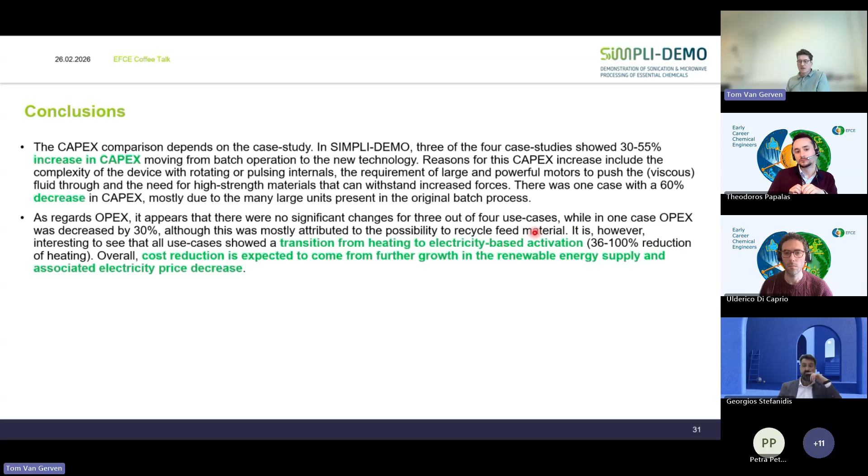Thank you, Professor Van Gerven, for this nice presentation. It's always nice to see the application of process intensification. For the audience, if you have any question, please ask it in the Q&A, I will be reading it. To start, I have one question, Professor.

It is about the usage of computational tools in this project. In the second part of your presentation, you used Aspen for the calculation for the LCA, but also in the previous part, I've seen some CFD-like simulation for mixing and flow efficiency. So I was wondering, how does it support the transition from small scale to bigger scale in this project?

Yeah, well, I think it's clear that on the level of the lab installations, we support our designs often with CFD calculations, computational fluid dynamics. This is still feasible because you're looking at small volumes, so calculation time is not that extensive. Obviously, that becomes more complicated when you go to a complete, fully integrated installation on the pilot scale. There, I would say there was no CFD modeling applied on those large scale installations.